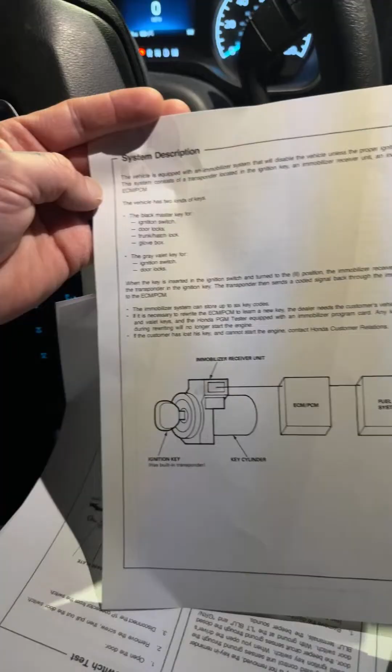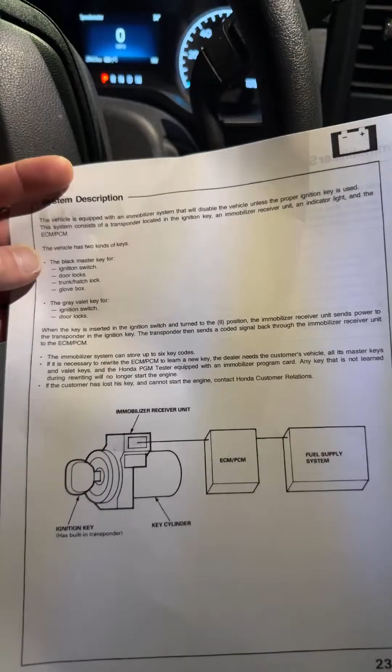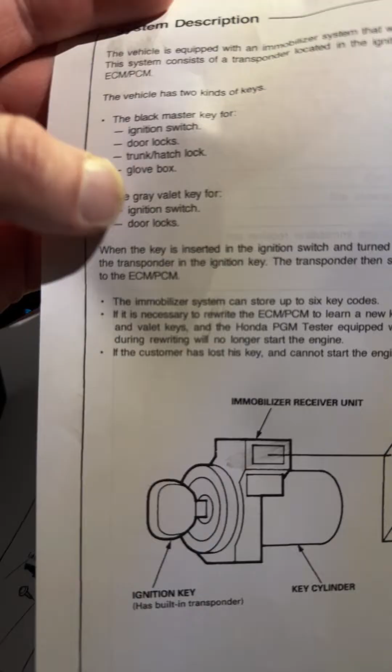Right here is how the immobilizer system works. Now if you have a Honda, you may want to take a screenshot if you work on cars, you're getting some free stuff here. The vehicle is equipped with an immobilizer system that will disable the vehicle unless the proper ignition key is used. The system consists of a transponder located in the ignition key, an immobilizer receiver unit, an indicator light, and the ECM PCM. So the vehicle has two kinds of keys: the black master key for ignition switch, door locks, trunk hatch lock, and glove box, and the gray valet key for ignition switch and door locks. You see the difference there?

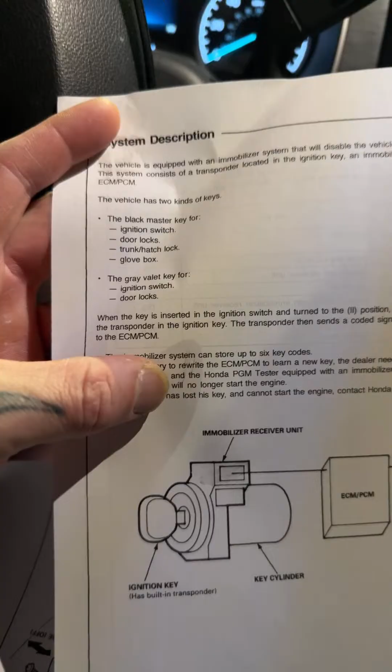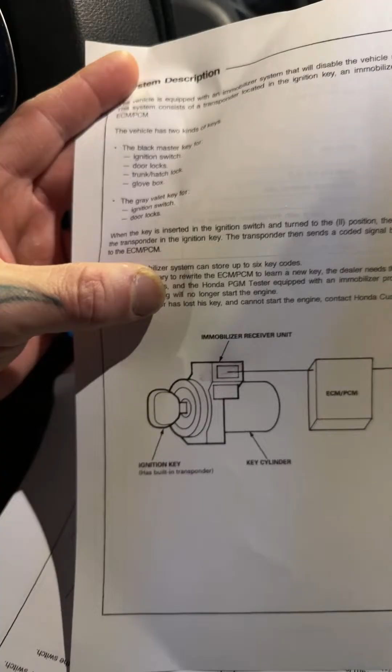And so when the key is inserted into the ignition switch and turned into the second position, the immobilizer receiver unit sends power to the transponder in the ignition. The transponder then sends a coded signal back through the immobilizer receiver unit to the ECM PCM. So technically it says, hey, you're okay to start the vehicle, right?

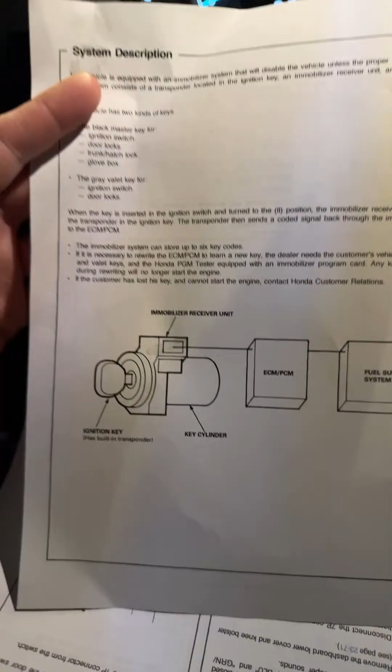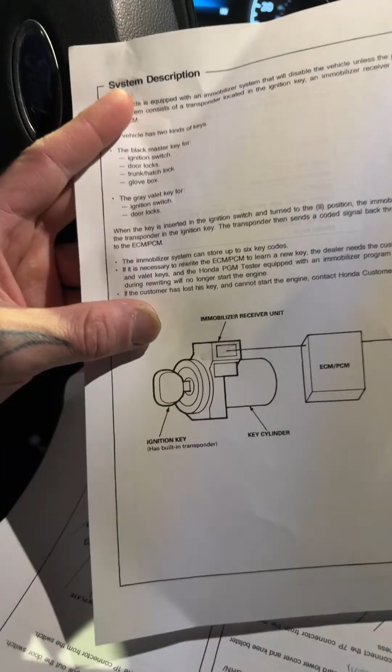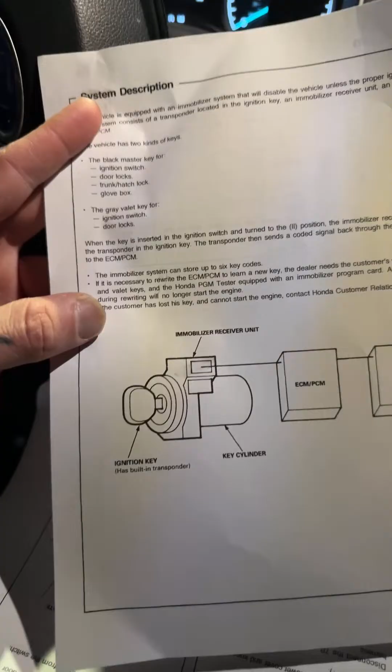Does that make sense? So the immobilizer system can store up to 6 key codes, which I've programmed before on a Honda Fit, similar year, and it's not hard to program with the Autel IM608 Pro 2 scan tool. You can do it, no problem. I wanted to be able to show you guys that, unfortunately I don't get to, but I usually just want to clarify why. So the immobilizer system can store up to 6 codes.

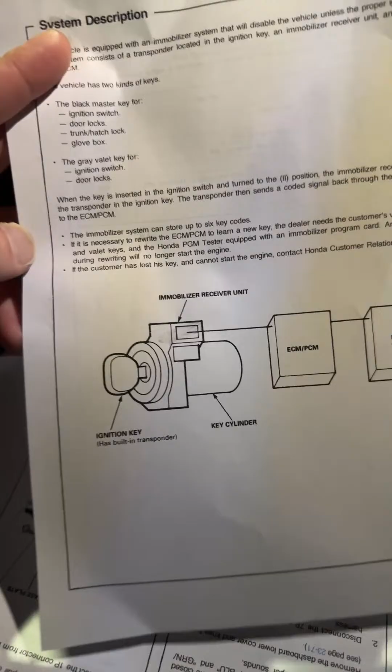Yeah I know, that's why I've got it right here baby, that's why I put it on here for you. So even though I can't, thank you man. If you're from Russia, I bet I do have an interesting accent.

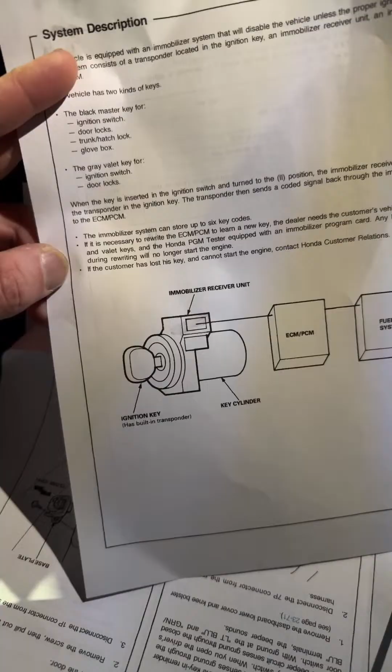Master answer, yeah, great, this is great information here, just so you know. That's why I'm reading it out anyway. Since I took the time to do it, might as well read it, right? I printed out all this stuff.

I might as well read it to you.

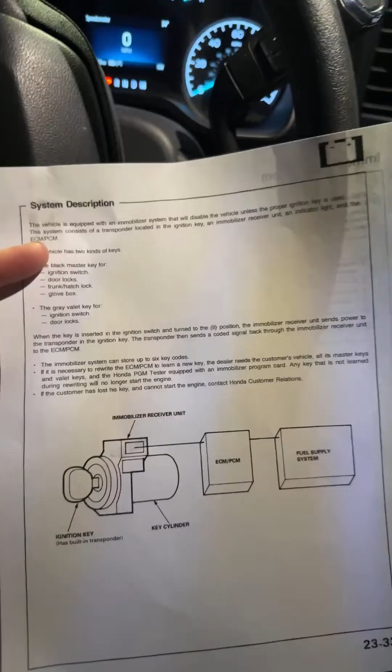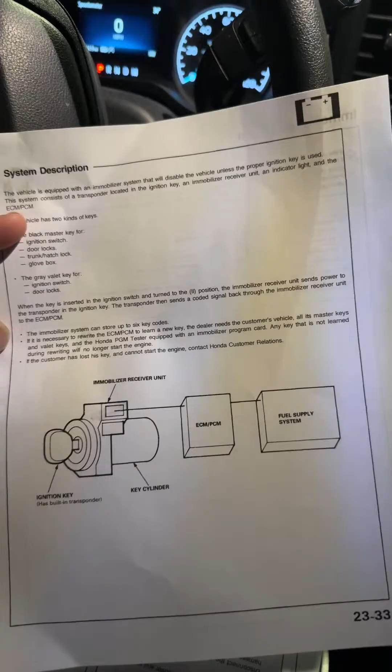So the immobilizer, anyway, if it's necessary to rewrite the ECM PCM to learn a new key, the dealer needs the customer's vehicle, all of its master keys, and the valet key, and the Honda PGM tester equipped with the immobilizer programmed card. Any key that is not learned during rewriting will no longer start the engine.

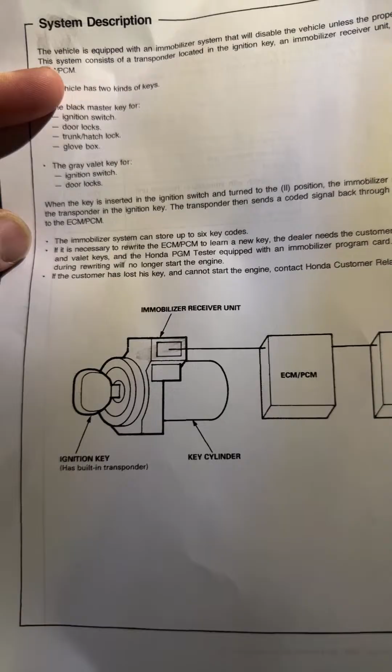So I've done this before. I'm going to explain it to you in layman's terms here in a minute. The customer has lost his key and cannot start the engine. Contact Honda Customer Relations - well, you don't have to do this. I'm going to show you why. So this is how it goes.

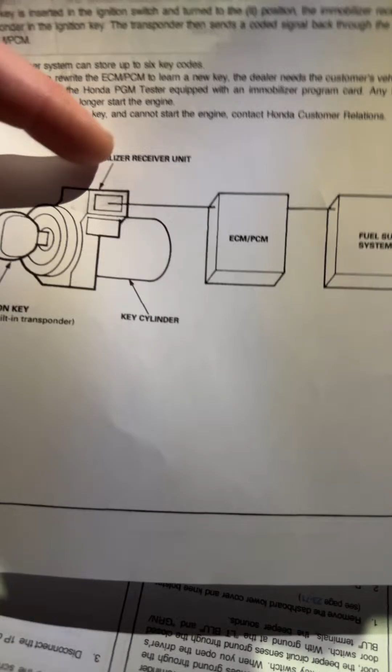Right there: ignition key, key cylinder, immobilizer receiver unit right up top. So you can actually take the key right up there if you want to bypass. And there's a way to bypass, there really is. And then the ECM, PCM, and fuel supply. So it cuts the fuel, is what it does. It will cut the fuel. I've actually had this happen.

So let me explain. I worked on a Honda Fit before, and I was working on it and the computer went out. Long story - the computer didn't work when I got done working on it. So I got it from another tech, had a problem, so I was like, why?

All I did was push - I took my hand down here, pushed it real hard up on the relay system, up on the relays as hard as I could down here like that. When I did that, it somehow messed up the computer. It was probably already fried - when I smelt it, it smelled burnt up.

So what I had to do was I actually had to replace the whole unit that's down there by your left foot - pull it out, replace it. When I replaced that, the new unit did not understand the old keys, so I had no keys. So with my Autel IM608 Pro 2, I was able to take both of those, reprogram it, and rewrite everything, and it worked great, no problems at all. It worked perfect, but it only took me about 15 minutes to program 2 keys.

Now, if you don't have all the keys with you and you start reprogramming, it's not going to know the keys. So think about it like this: if I replace the lock cylinder here, the middle piece - let me show you - if I replace this little center piece, so I take that out and replace it, if I don't have a functioning learning key, there's no point. And I can't stick the old key in because it's not going to fit. That makes sense? So that's where I figured out it's no point in doing this.

We're not going to be able to get it done. So let me finish showing you what I got right here. So I called him and said, hey look, you have 2 options: you can bypass the immobilizer, I can tape up - basically what you can do is you can tape one of the older keys up here, this one's only got 1 key - or you can take the back piece off and put 1 key up there.

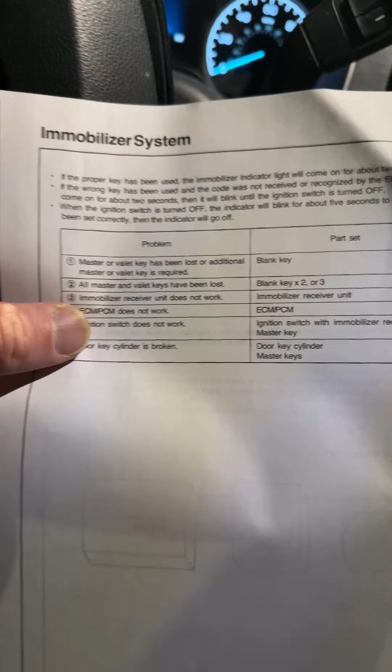So anyway, this goes on to say more: the proper key has been used, the immobilizer indicator light will come on for about 2 seconds and go off. If the wrong key has been used, the code was not received or recognized, blah blah blah. So anyway, this is what it shows.

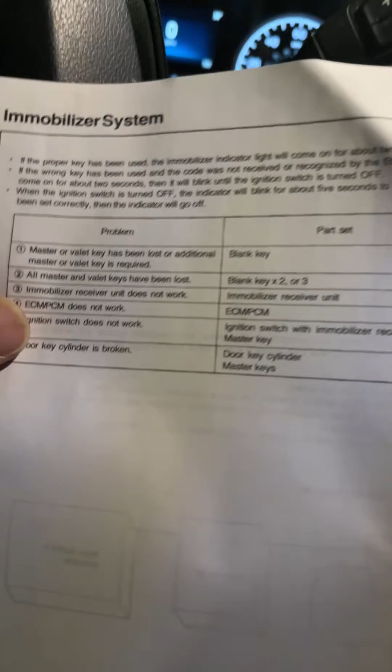The different issues here - I'm going to let y'all view these since I printed them up and wasted a bunch of paper. Right here, though, you'll have like a green key icon that flashes, kind of looks like this color green, but it's right up here - flash, flash, flash. And that means you don't have the right key. So there you go, and also I have basically how you would do the job as well.

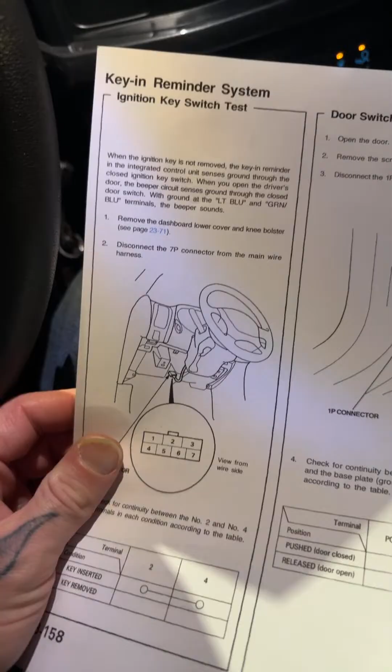So anyway, this is just some more stuff I got. It just says key-in reminder system, ignition key switch test. So when the ignition key is not removed, the key-in reminder in the integrated control unit senses ground through the closed ignition switch. And this is why I'm thinking you may not be able to use a certain bypass on this vehicle because of this - so with the ground at the LT blue and the green/blue terminals, the beeper sounds.

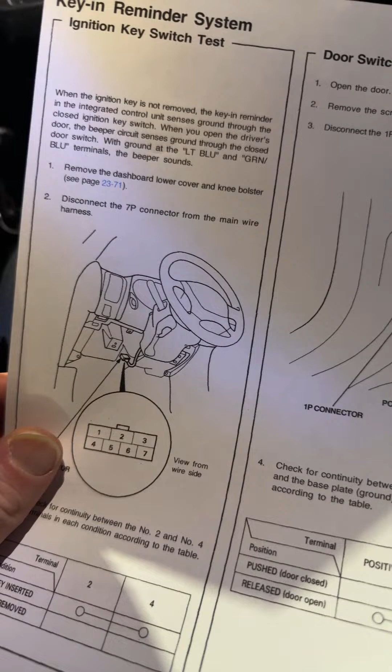So remove the dashboard lower cover and knee bolster. It says disconnect the 7P connector from the main wire. It's right here.

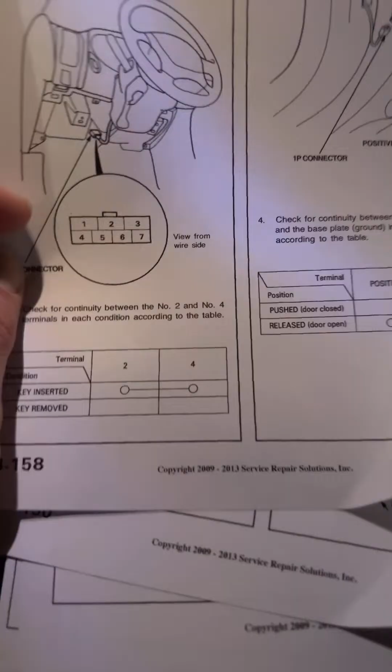So you can get a better view of that. So you're working on a key on a Honda. This is all good information for you, so I'm letting you see it.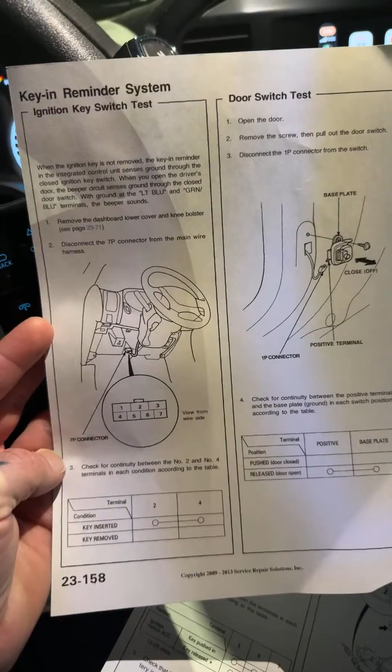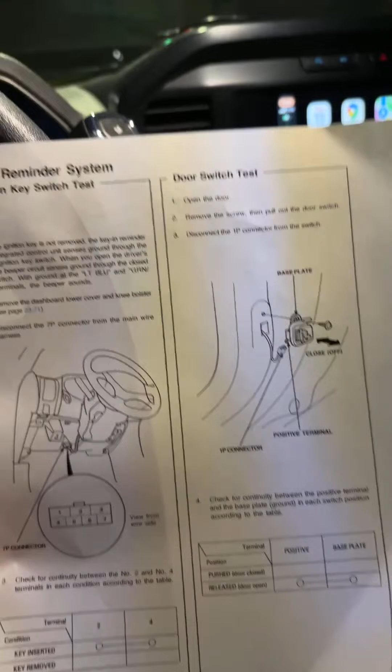I mean, might as well, I pay for this stuff a lot of money. They just upped my bill too, so go ahead and view it at your liking. Oh man, he's upped me $300.

I gotta call them later and talk to him about that craziness. View from wire side, you can see. Check for continuity, key inserted. That's what happens up here.

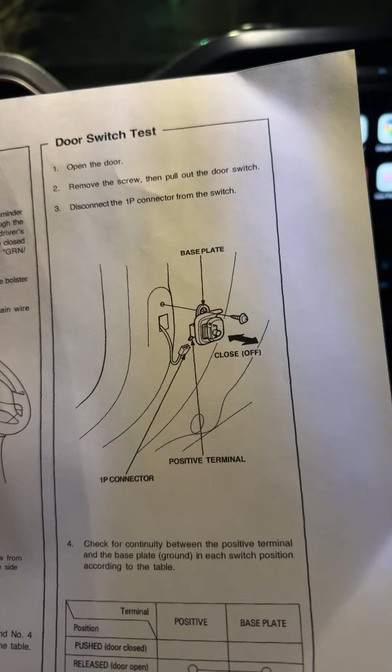Open the door, remove the screw, then pull out the door switch. Disconnect the 1P connector from the switch. Right here is just showing you. I think you can actually maybe turn that off, possibly. I don't know. Check for continuity between the positive terminals.

So this is just something. It doesn't really tell you a lot, but this is what I want to show you. So this is what I was planning on doing tonight right here, if you look. Check the interlock system here too as well.

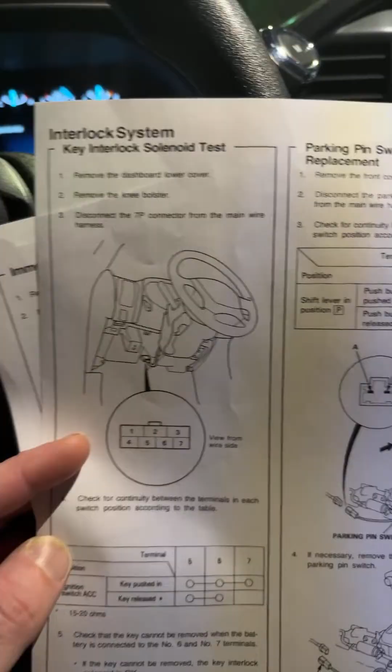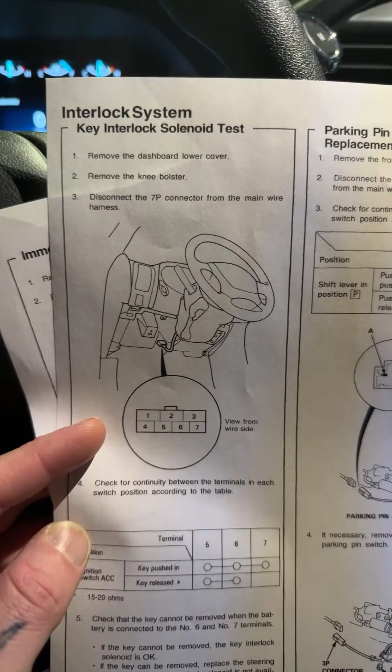Remove the dashboard lower cover, remove the knee bolster, disconnect the 7P main wire. It's just telling you all this stuff here. And this is how you can also test the parking pin switch. So it shows you different tests you can do.

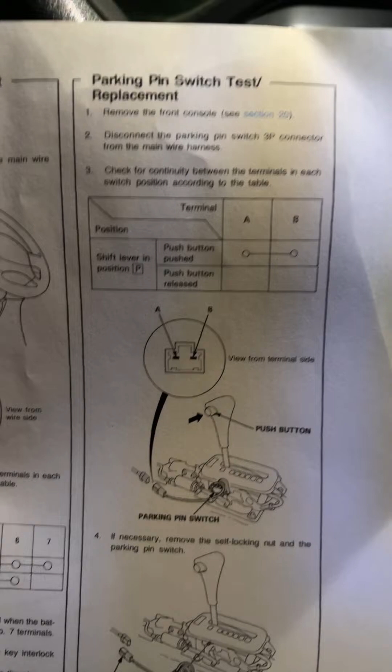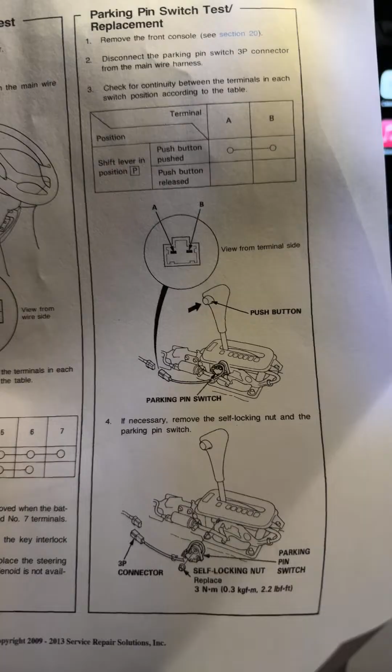Remove the front console, disconnect the parking pin switch 3P connector from the main harness. Check for continuity between the terminals in each. And right here, view from the terminal side, push button, you can see the parking pin switch. If necessary, remove the self-locking nut and the parking pin switch.

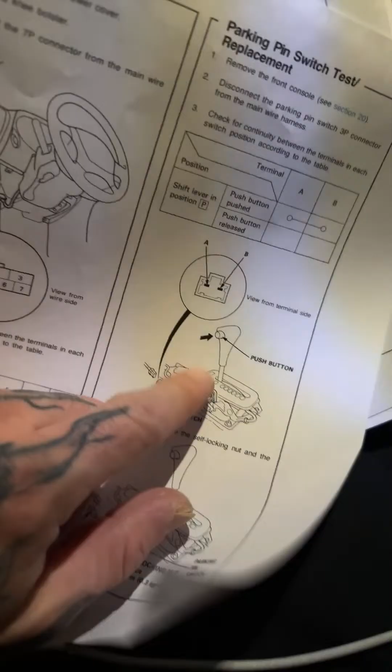Let me tell you something too, a lot of Hondas, people don't know, this area right here is where your fuel pump wire runs. So I was able to check the fuel pump wire. The last time I had an immobilizer go out on me on a Honda, I was actually able to take the cover off right there down where I showed you on the image, pull the cover off right by the gear shifter lever, pop it up, and right there's your fuel wire. It's usually an orange wire on these Hondas that runs back to the fuel pump. So I could actually take my probe, feed it gas, and I could keep the car running.

It's kind of crazy, I know I fed it power and the car would run. Well, I think I fed it ground, actually, one of the two, I can't remember. But yeah, it's on one of my videos or streams. I'm not sure. But let me show you this right here.

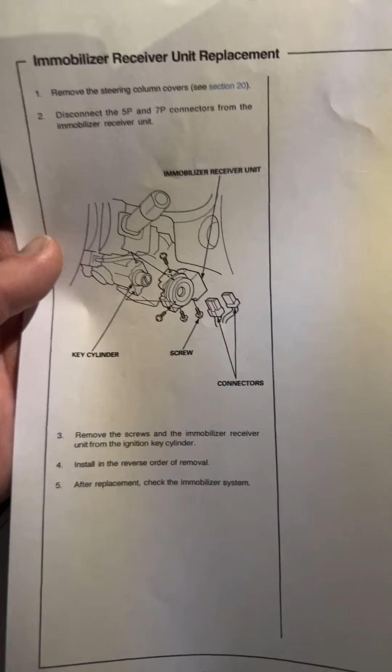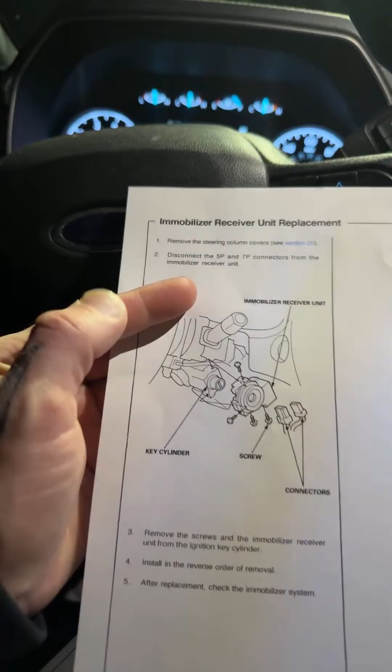Removing the steering column covers, I just told you to take it off. Disconnect the 5P and 7P connectors. You can see right here, it's a lot of stuff to do for the immobilizer receiver unit replacement.

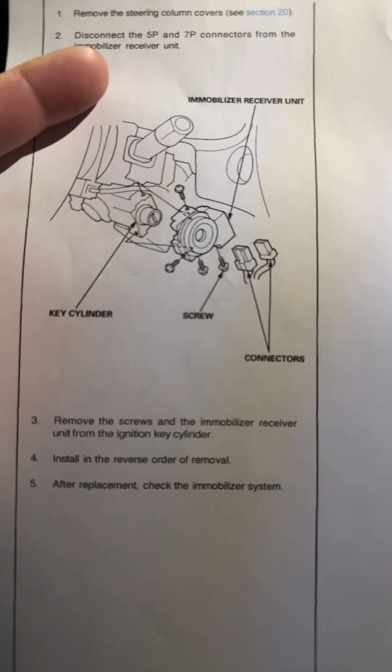Now, when they sell the new key, the one at CarQuest is like $700, $800. It's crazy, but it comes with the entire new connectors, the screws, and all that good stuff. It really does. Right here is the key cylinder. This is all I needed to replace right here earlier. But they don't even have it. Maybe I could have got it at Advance or Napa parts.

But you can see right there, that guy right there, you basically have to just drill them out of there, and then you can replace just this lock cylinder right there is all. And then it says remove the screws and the immobilizer receiver unit from the ignition key cylinder. Install in reverse order of removal. After replacement, check the immobilizer system just to make sure it's working properly.

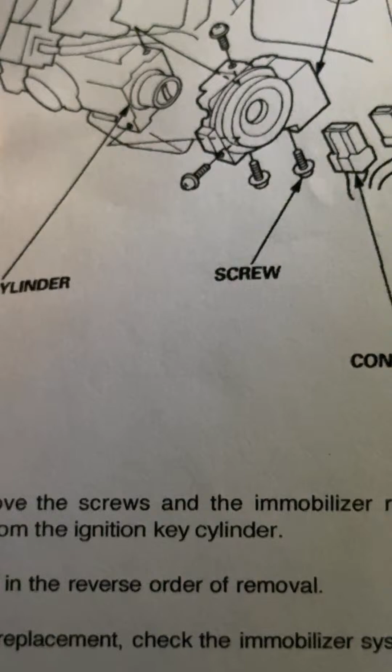Right now, what am I saying? That's all you got to do. So right there, that's on the back, and here's my last sheet. This is what you actually have to do to remove the actual - save the best for last, right?

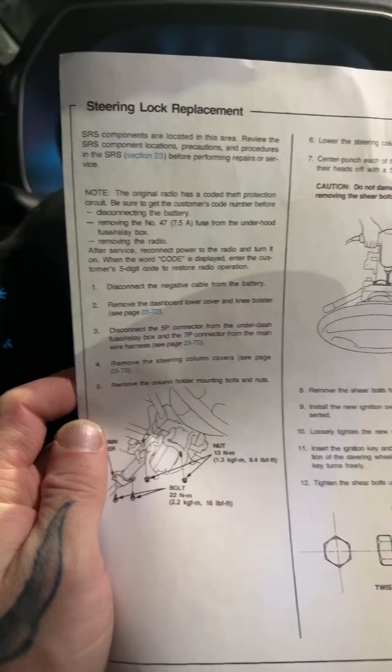Steering lock replacement, that's what I was hoping to do. So right here, steering lock replacement. SRS components are located in this area, just basically don't touch that stuff. If it's yellow, don't touch it. It's not going to hurt you, though, trust me. But make sure you have the battery unplugged before performing repairs or service.

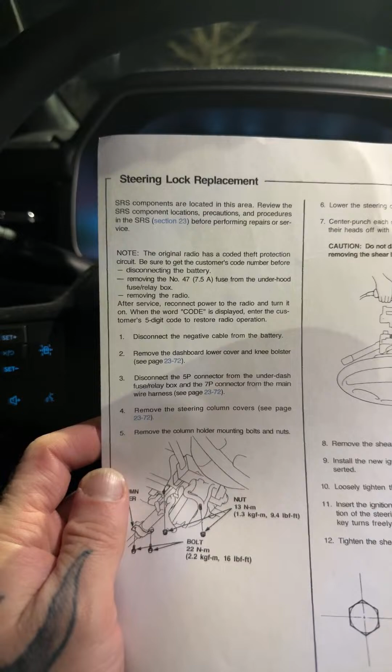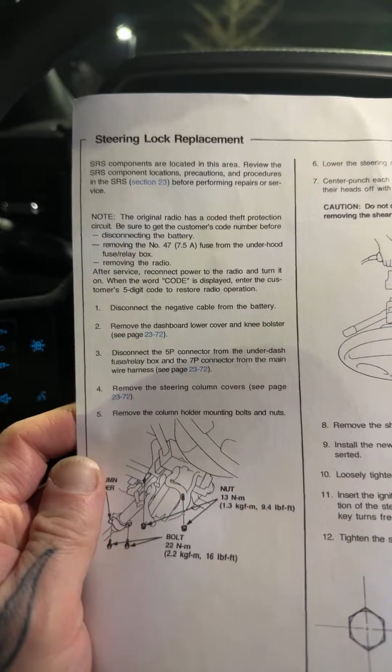The original radio has a coded theft protection circuit. Be sure to get the customer's code number before disconnecting the battery. That's just for your radio, okay? Everybody knows that, I hope you do. It should be in your fuse box or whatnot.

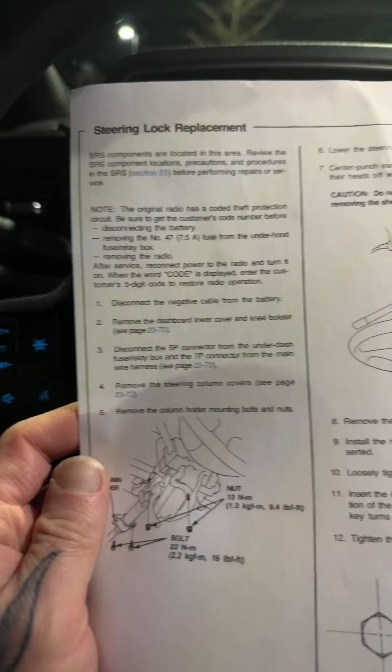It says removing the number 47, 7.5 amp fuse from the under hood fuse relay box. Removing the radio, after service reconnect power to the radio. Anyway, we're not doing the radio.

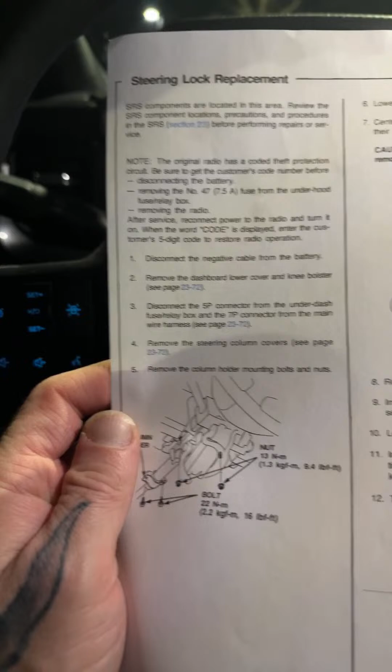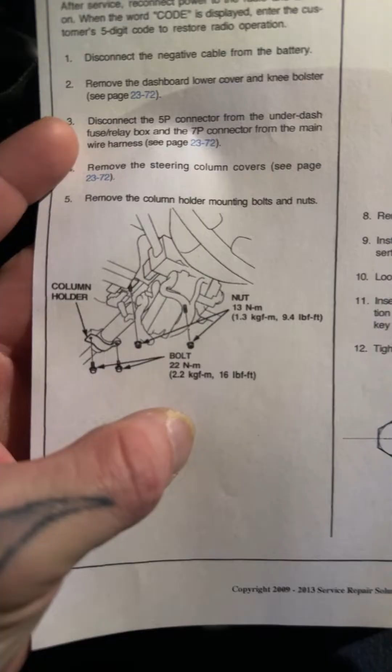She says it all right on there. Pretty easy, straightforward stuff. And right here, lower the steering column assembly.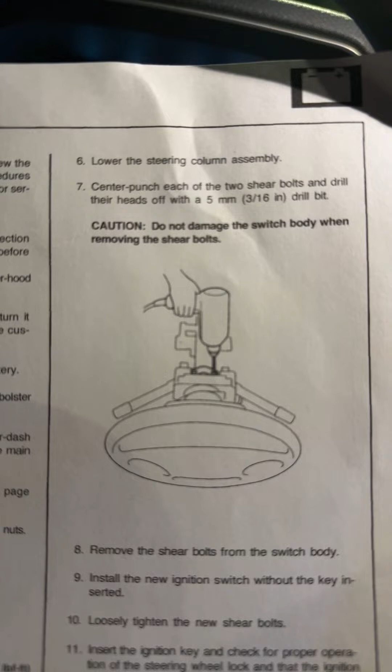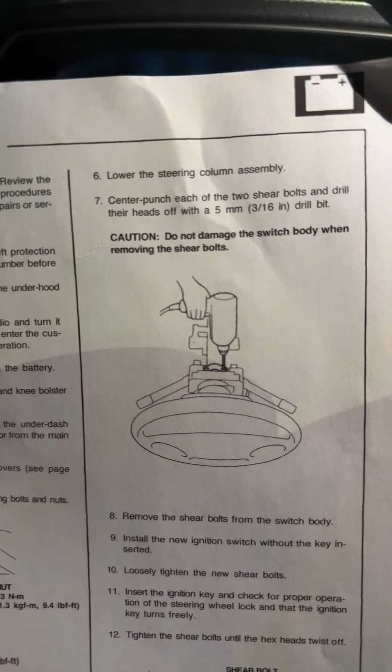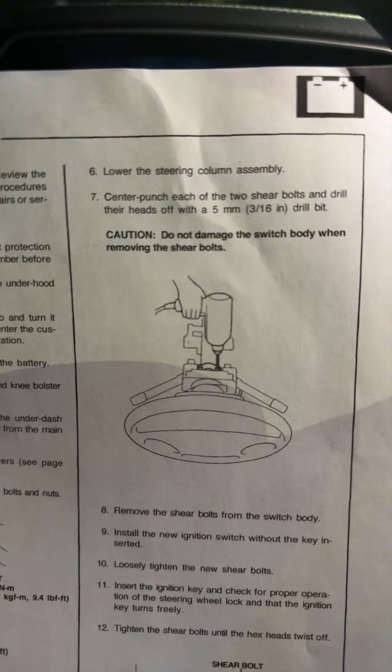Center punch, which you take a punch and a hammer, and you want to take a few little whacks and put a center punch, right? And each of the two, I thought this was really interesting earlier, the 2 shear bolts, and drill their heads off with a 5mm, 3/16 inch drill bit. Caution, do not damage the switch body when removing the shear bolts. So they call it shear bolts.

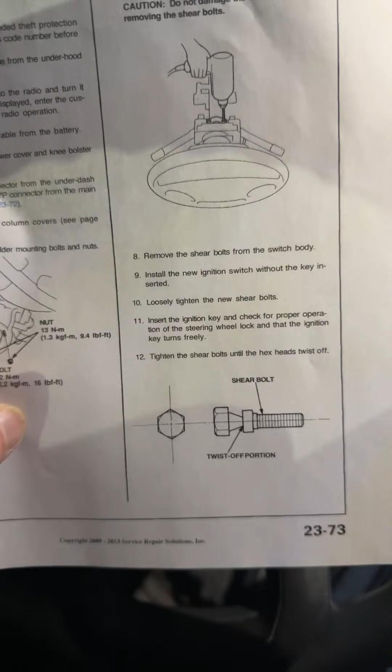Let me show you what they do, right here. Remove the shear bolts. I can do this, y'all can actually see it better. It's getting blurry. Remove the shear bolts from the switch body.

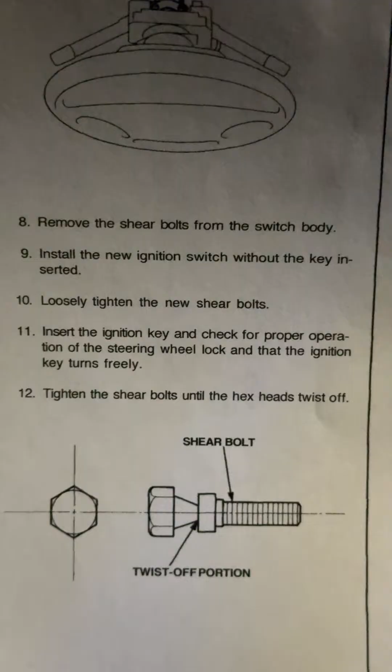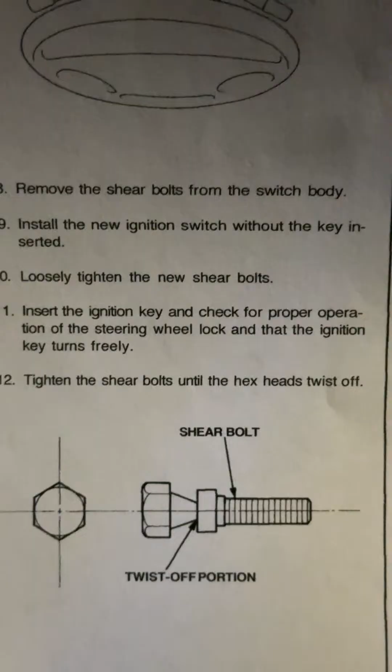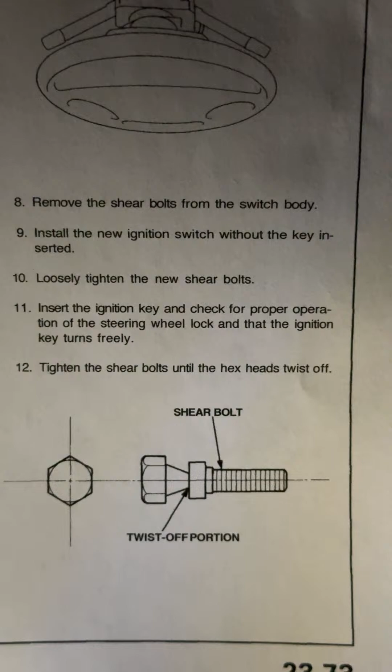Install the new ignition switch without the key inserted. So make sure it's installed without the key inserted. Okay, very important. Number 10, loosely tighten the new shear bolts. Number 11, insert the ignition key and check for proper operation of the steering wheel lock and the ignition key turns freely. Tighten the shear bolts until the hex heads twist off.

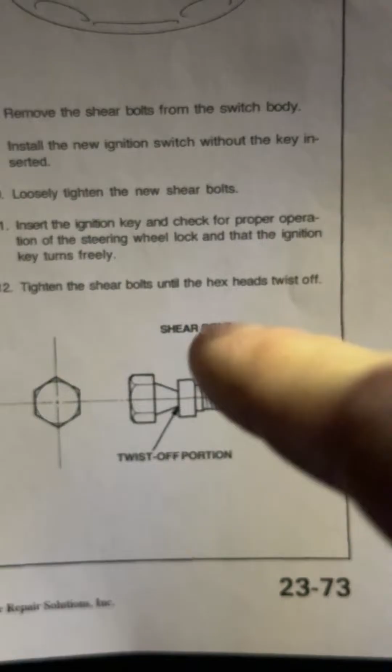So it's kind of crazy, tighten until the hex heads twist right off of there. Pretty interesting, I've never actually seen that. So these new bolts twist right off and snap off, I guess. So that's why you have to drill them out, because when you install this stuff, they're made so they do that.

I'm not sure if everybody understands, the reason they do that is so people can't steal your car. It's kind of smart in a way, but kind of annoying, so now you can't get your car fixed easy. But if the heads shear off, you can't take them out, that's why you got to drill them out. So in case you ever wonder why you see a mechanic underneath your vehicle with a drill, that's why, because they're actually trying to get those shear bolts off. That's kind of cool stuff.

I just thought this was interesting. I printed off all this paper, wasting half my night doing this for nothing. But this is what happens. It's better than going down there, installing everything, and not being able to fix it.

And the thing that tipped me off is when I got it, I could tell right away it was not for the correct vehicle. It was for a GMC, you could tell by the shape of the keys. So either way, that was a wrap, and luckily I didn't drop the ball there because that could have been easily screwed up, guys.